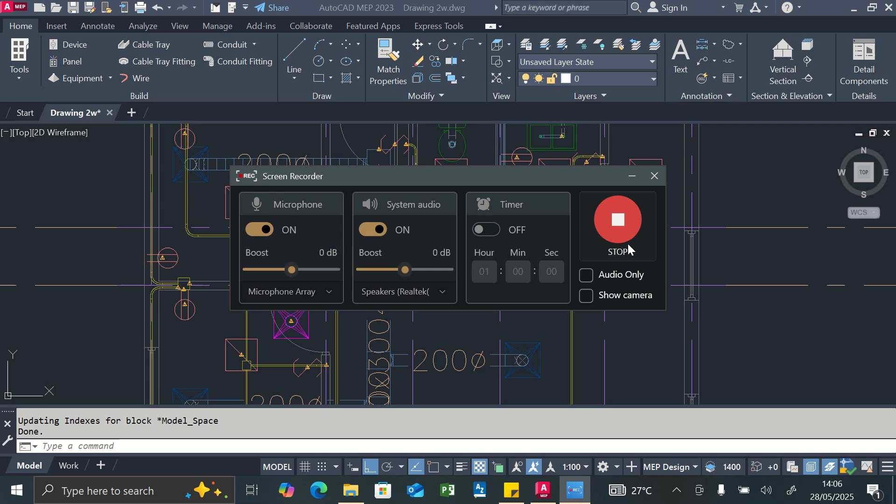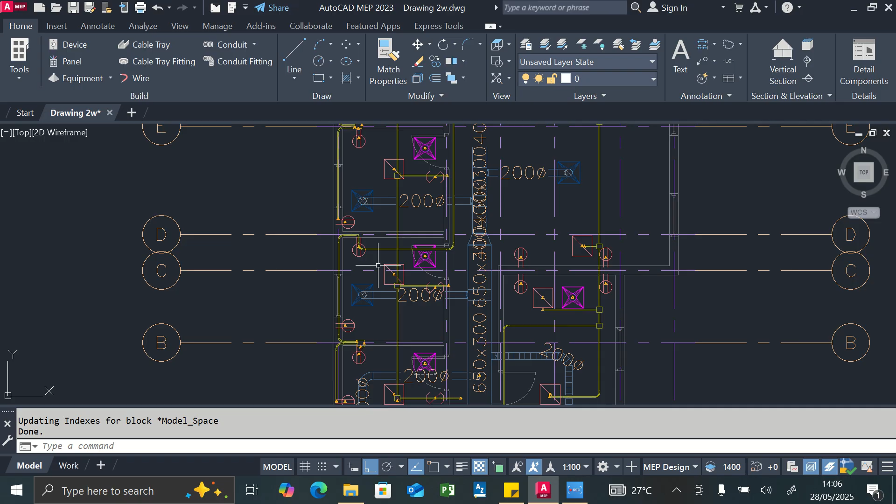Today we are going to be continuing with the creating of conduit for the power supply system. This is part 2 of that as well. We've been able to connect all the power circuits for all the sockets around this part of the office. So today we are going to be concentrating on this. So let's continue with the conduit and we'll say that we're going to be combining four sockets to one circuit. So from here, remember the elevation of our socket is at 400 from the ground.

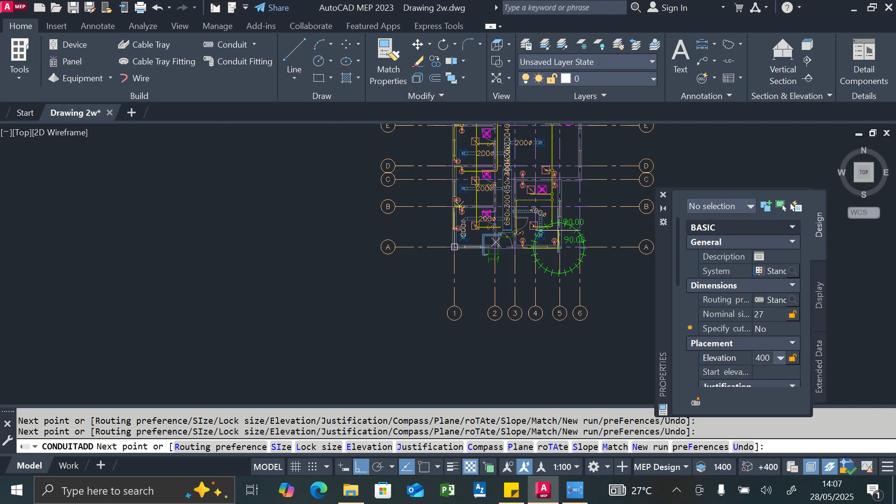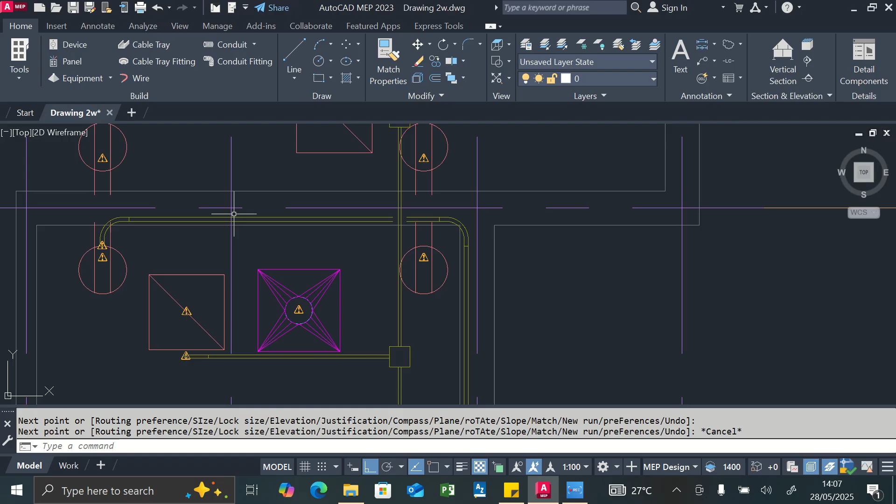So from here I'm going to click here, continue like that. And then all the way it goes on the wall, connect these other two guys. So please try as much as possible for it not to snap to, no, it will return it to 0. Okay. So at this point here, let's just put the box there. Normally we're supposed to have like a knockout box, but we'll make do with the options that are there.

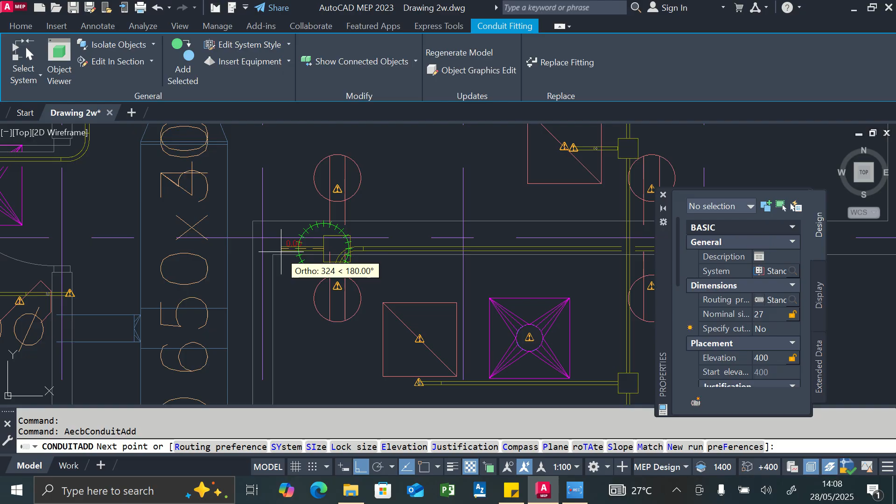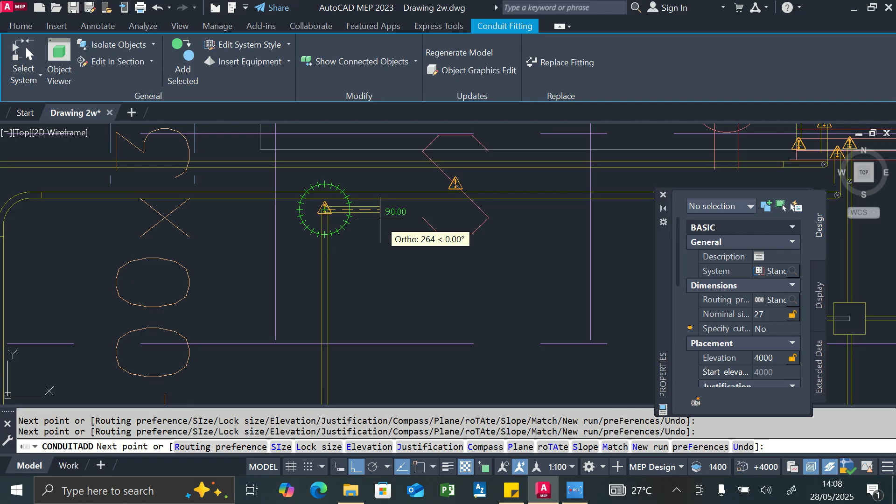Alright, so at this point, we're going to raise it up to a height of 4,000, where we have the soffit of the slab, then to our dB. Alright, so then we'll take it to the dB. I'm going to stop it here and arrange this very one. I want them to be very close. I'm going to move it a little bit high to this point. Perfect. Then I'm going to move this a little bit away.

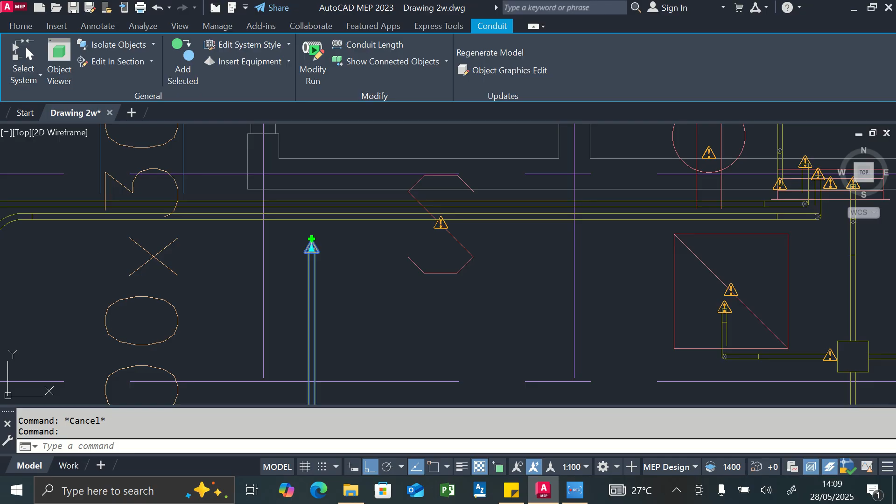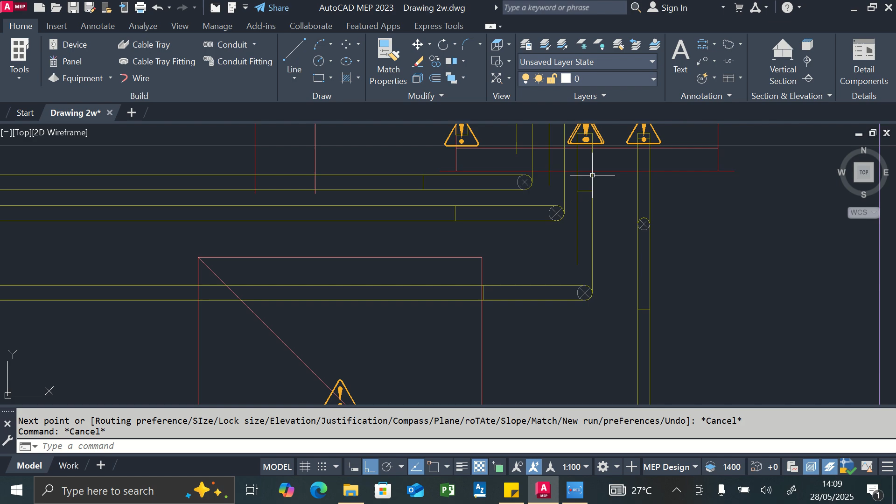Okay. So I'll continue by clicking the triangular sign. Click on the arrow there. And here we have it. From here, it's going down to 1.2 meters. So we have the height of the dB. Very good. Alright, so I will delete the extra portion of this particular line here, and also move this to go closer to this particular line here. Okay, we are good.

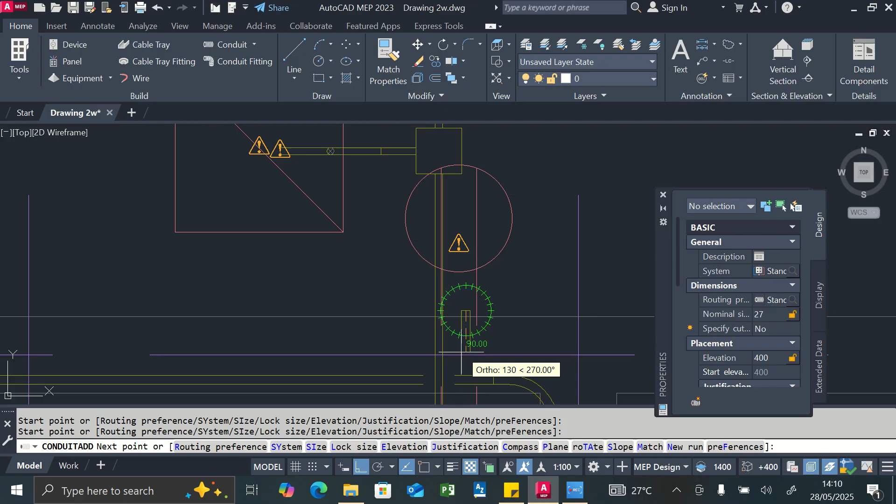So we've been able to connect the various receptacles for this particular office. So we still have 1, 2, 3, 4 left, 2 in the kitchen and 2 in the lounge. Alright, so let's click on conduit to create the conduit. So it's at elevation of 1.2. Make sure you change it to 400. So I'm going from here. Make sure you go close so that it doesn't. Okay. Alright. So it goes all the way.

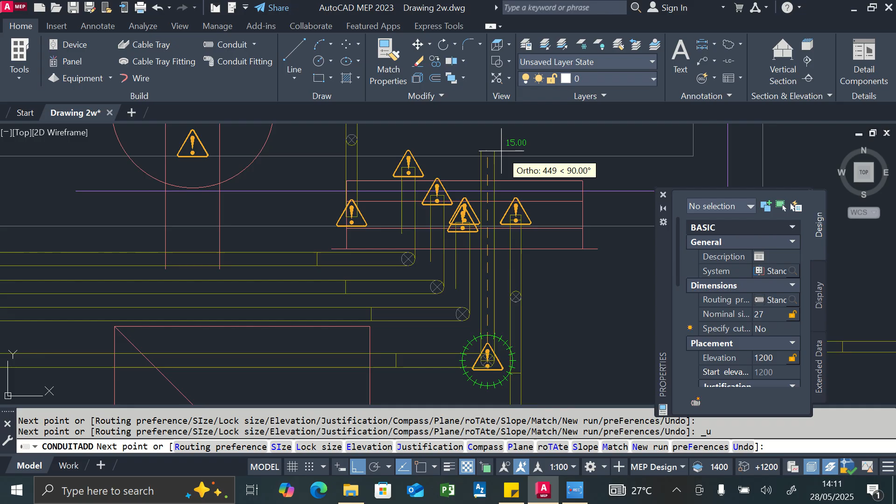So from here I'm going to take it to a height of 4 meters. So it goes like that, like that, like that. Change it to 1.2 meters. Okay, so it goes down. Control Z. Okay, so I'll trim off this extra portion of the pipe. And also I'll move this conduit very close here.

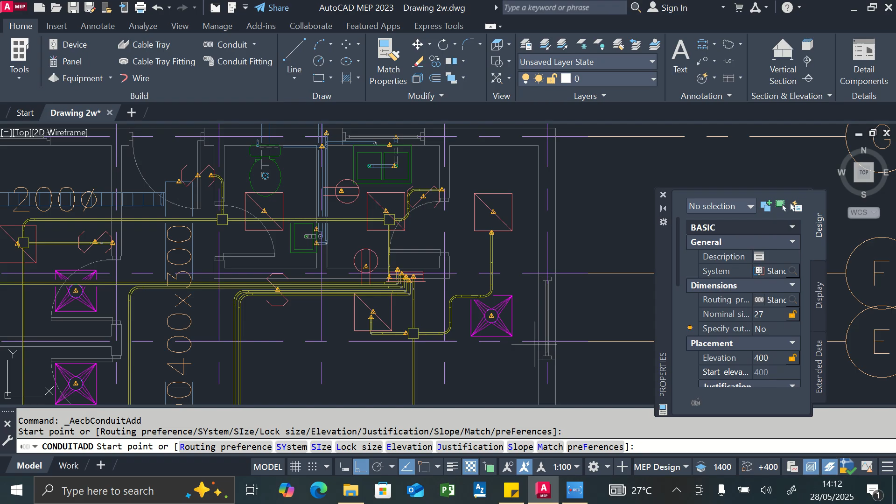So remember that we only have two particular receptacles connected to this last circuit we just drew. So let's connect these two to that particular circuit. Alright, or let's create a separate circuit for the kitchen. Alright, so go to Conduit, change it to 400. You have the position of the circuit. Okay, we'll draw them all the way.

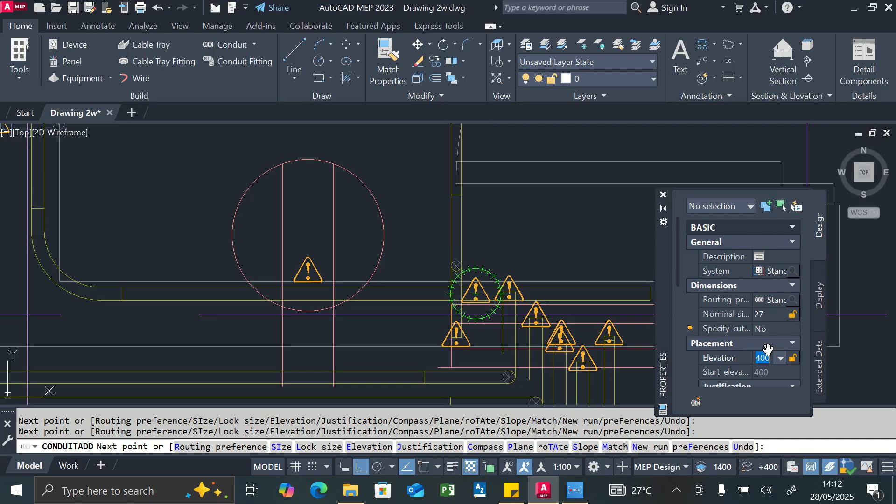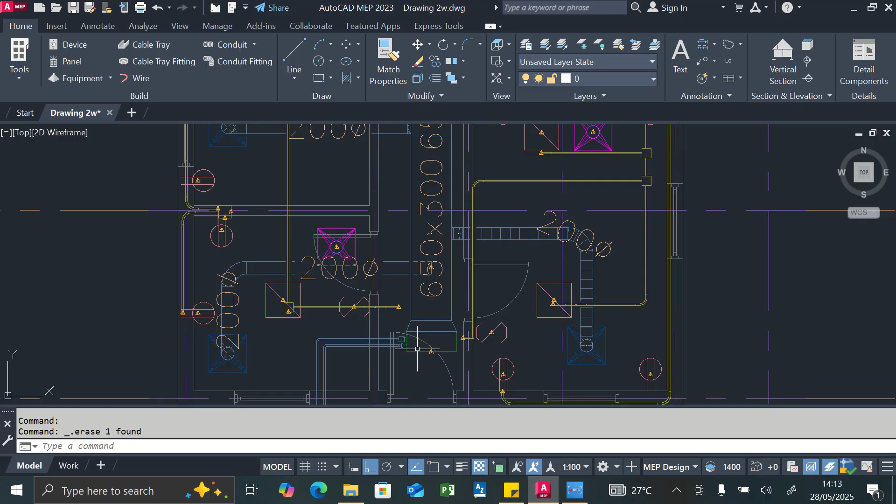So it will come from ground, right? So it's coming all the way from down to a height of 1.2. Okay, so I'm going to draw to allow me to be able to delete the ones I don't need. So I'm going to click on this and delete. So if you notice, this goes like this all the way and travels upwards where we have the dB. So at the moment we've been able to connect all the power circuits to the dB. So from next week we are going to be connecting the conduit for the power supply to the HVAC system.